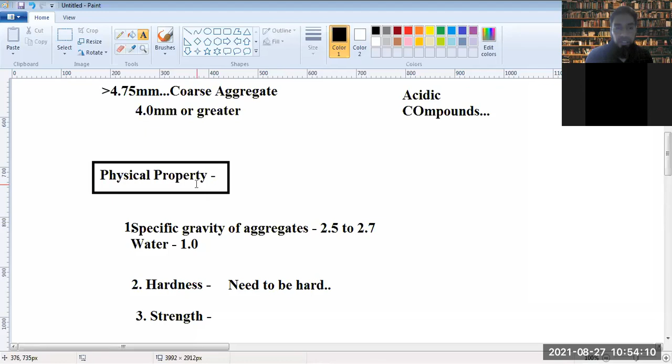As compared to cement. So aggregate actually gives the strength to the concrete mass. When we are talking about aggregates, we discuss two properties of aggregates. One is its chemical. Chemically, it should be inert. Second, the physical property, its specific gravity should be between 2.5 to 2.7. Its hardness, it needs to be hard enough. Its strength, it's usually stronger than cement. But is it stronger than concrete mass? Yes, it could. Individual aggregates could be even stronger than the concrete mass.

Then why do we use concrete and why don't we use stones in replacing the concrete? Yes, any one of you? Which I just discussed. Is the aggregate stable within the concrete mass? And what should be the shape and size? Stability I discussed in terms of the chemical property. Is it inert or not? Then comes the shape and size of aggregate. Should it be round? Should it be angular? Should it be flaky? What should be the shape of the aggregate which we use in concrete? And what should be its size?

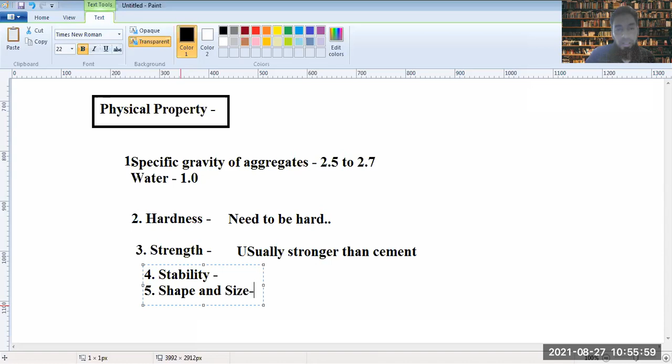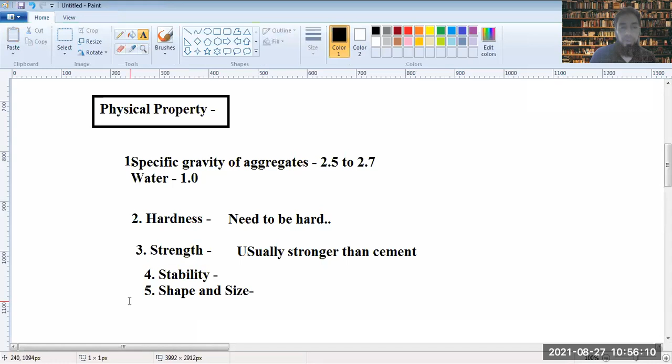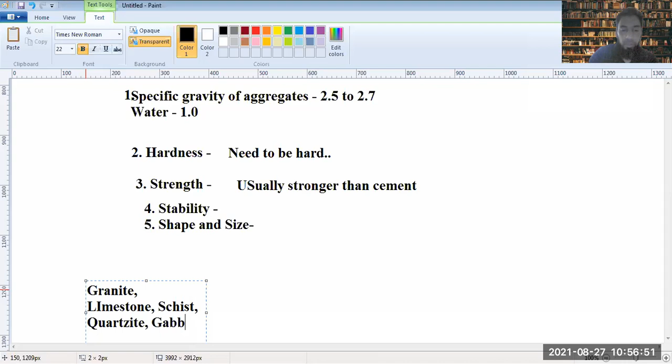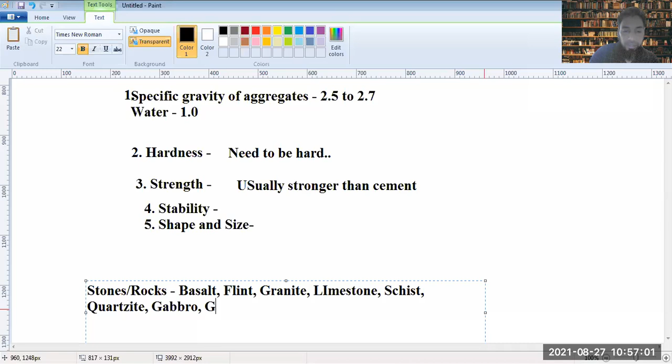Now, aggregate varies from 4.75 even up till 40 mm. But what size do you use in concrete? That's important. That we'll discuss. So where do we get the aggregates from? We get them from different stones or rocks. One is basalt. Basalt is one of the rocks, and its group. Second is the flint, granite, limestone, schist, quartzite, and you also have gabbro and gritstone. These are the rocks from which the aggregates are obtained naturally.

Now, in what form do we have the coarse aggregates? They are in form of crushed aggregates. In what form do we have the fine aggregates? They are naturally obtained. Sand is naturally obtained in whatever form you are getting it.

Now, the important criteria is when you are doing the testing on aggregates, आप क्यों करते हो testing of aggregates? In order to know various things. We want to know the particle shape. This is the first test that you perform on aggregates. Then the texture, how does it look like? Then we want to know its sphericity. How much rounded is it, or how much roundness does it have?

We want to know its flakiness or the flakiness index. Flakiness means how thin is it. Now this is a converse to the sphericity. Sphericity is इसमें कितनी गोलाई है. Flakiness is, is it in flakes? Just like जब आप potato chips लेते हो, you call them as flakes, because they are very thin. So how much flakiness does the aggregate have? The elongation, how much elongated are these aggregates? That's very important. And I talked about the texture.

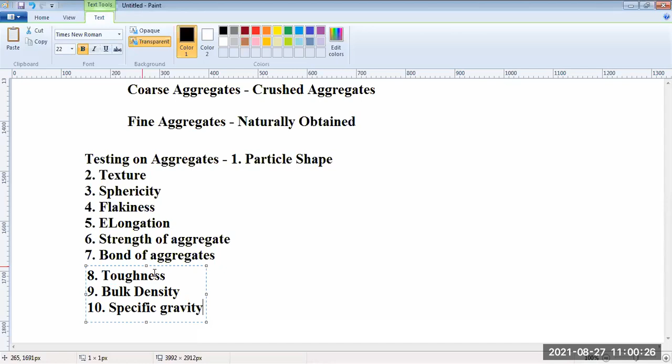How much toughness do these aggregates have? And we want to know about the bulk density or the specific gravity. We either know the bulk density or we know the specific gravity of the aggregates. We also want to know the porosity and absorption of aggregates.

Very important, because stones, aggregates, they have a property of a lot of moisture absorption. So we want to avoid that, because they have a large amount of permeability. So we want to avoid the absorption or the porosity once the concrete is formed. So their porosity should be less.

So once I discuss these two types of aggregates, we are now clear about the composition, first of all, of aggregate. If it's obtained from the riverbed, because it has not broken down, it has eroded a little bit, so it might be a sedimentary rock. There are very less chances of it being a metamorphic rock on the riverbed in such a formation. So we know its composition.

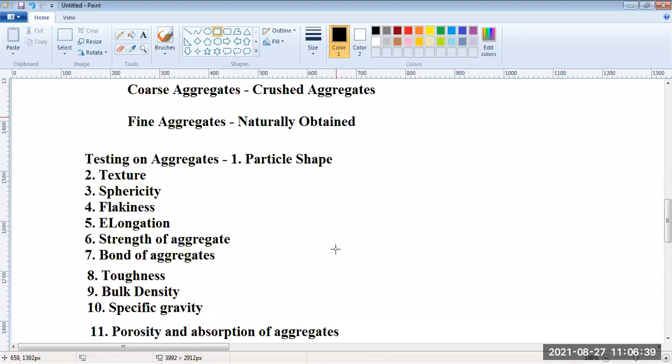So both for gravel, which is the coarse aggregate, as well as for sand, which is the fine aggregate, you take samples in such form for testing. Now, once we have the sample, what do we do with it? First of all, how much sample do we take? We take 50 kg of sample.

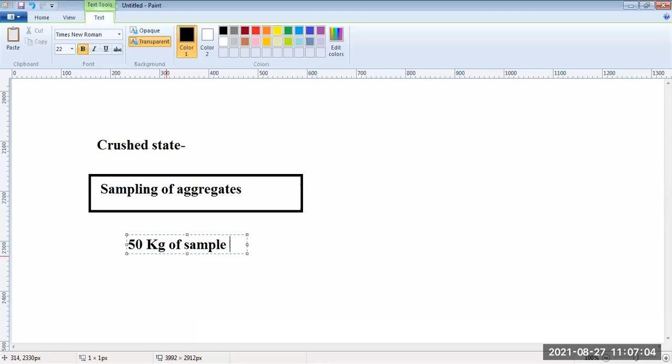If the coarse aggregate is 28 mm, this is the minimum sample that we need to take. 50 kg हमें सैंपल लेना है if the average size of the aggregate is 28 mm. So minimum you take 50 kg of sample here.

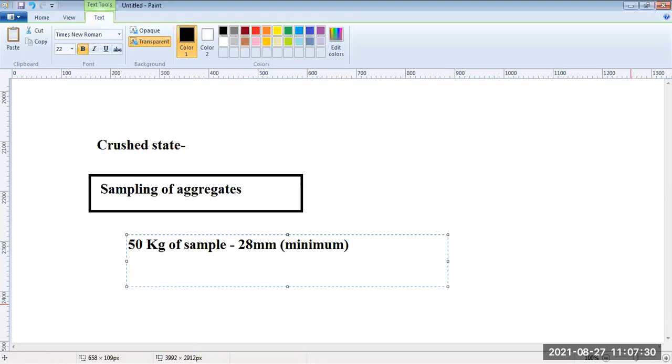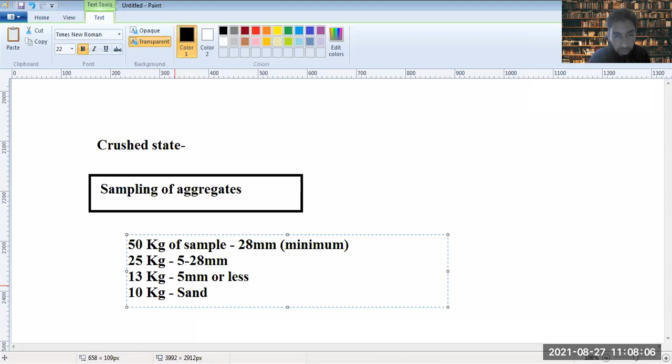Then you take 25 kg if you have 5 to 28 mm size. You take 13 kg of the sample if you have 5 mm or less. So in sand, you will usually need around 10 kg of sample, in case of sand which is 4 mm and less, around 2.36 mm and less. So this is the sample size that you need to take for testing.

Then the first thing that you do is the particle shape and texture test. Now, how do we determine this? We first determine its roundness. Roundness is how much is the sphericity of the particle. Greater the roundness of the particle, if it's completely a sphere like a ball, it will not bind properly within concrete, with cement paste.